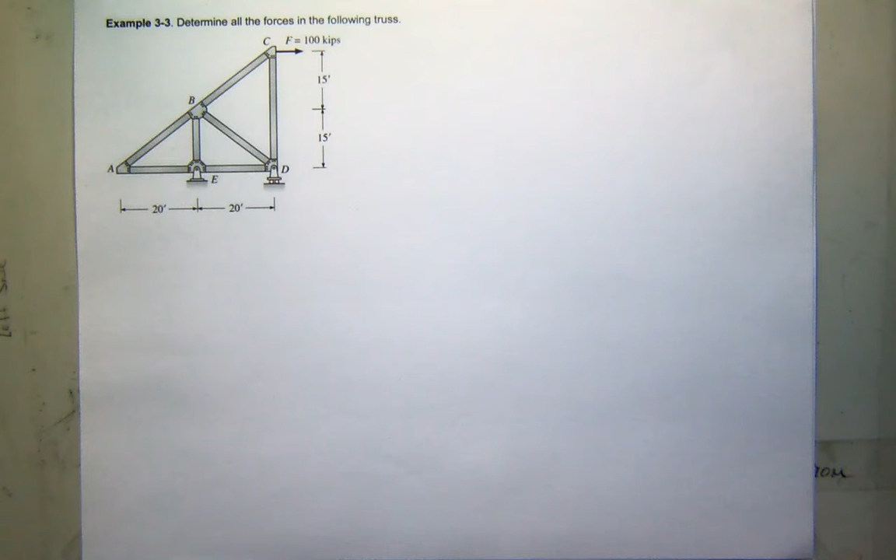Okay, so in this problem, we have a truss with a load of 100 kips applied at C, a pin connector at E, and a roller at D. So we've got 3 unknown reactions, and if you count them up, 7 bars, 7 unknowns.

Now it's a good thing to always start a problem looking for zero force members. Do you see any potential, what we call case 1 elements?

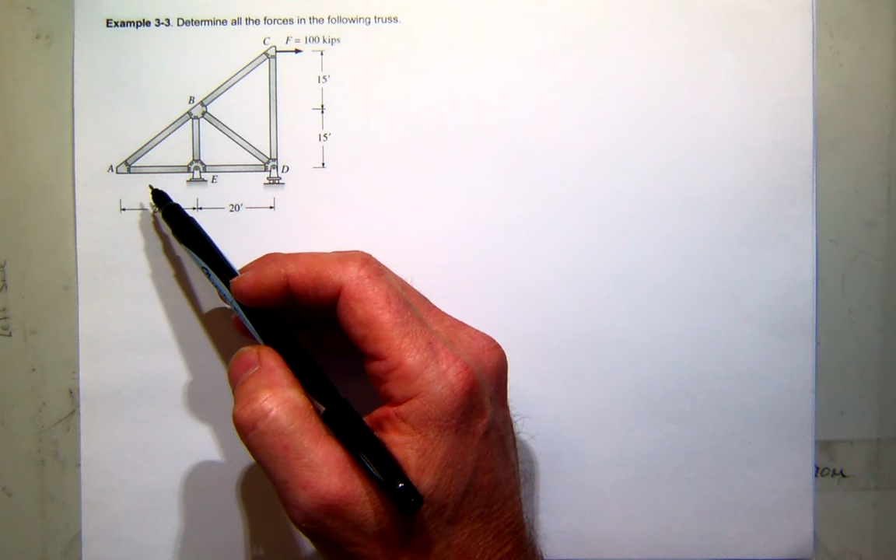A. What's good about A? Well, it's got 2 elements, right? But more importantly, no load. So that means right off the bat, I can write that I have a couple of zero force members.

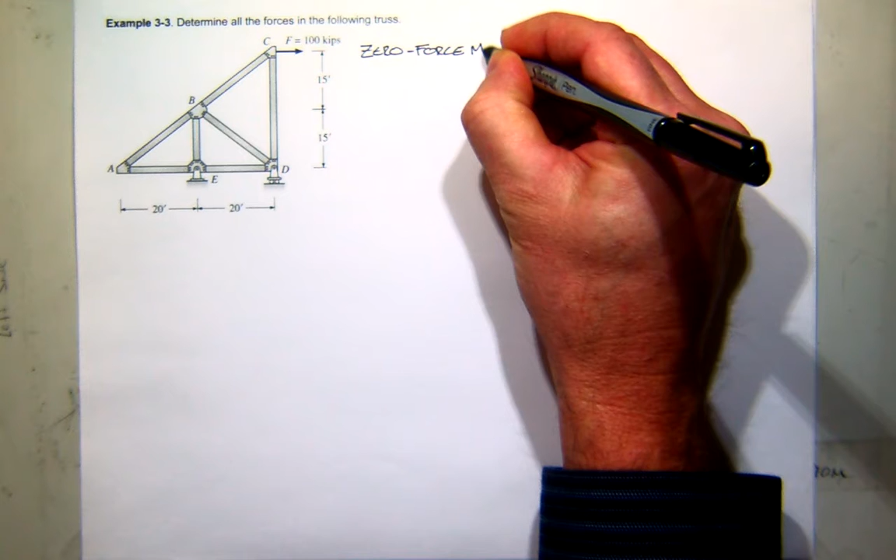And to connect that back to what we've done in class, I'll call that case 1, the 2 elements concurrent at a point with no load. So that means I know that the force in AB is equal to the force in AE and is equal to 0.

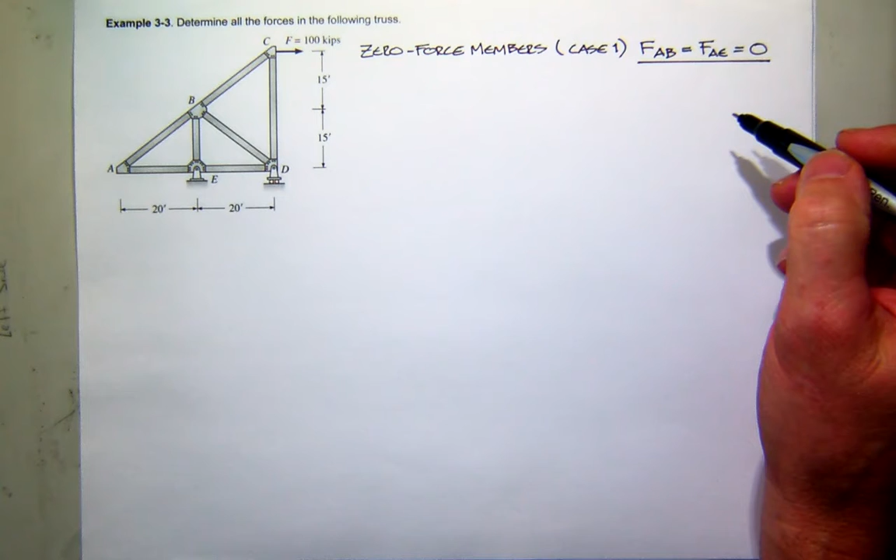Only one word of caution: if it's not a zero force member and you think it is, well, you really stepped off in the wrong direction. But if not, it can really be a help. So very quickly, I know 2 of my elements without much trouble.

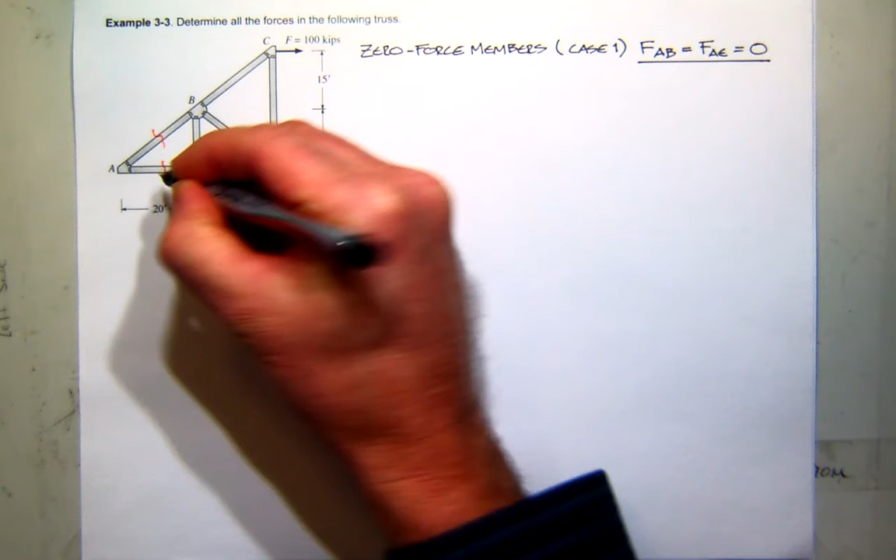With that said, I haven't found any of my reactions yet. Do I need to do that, or can I actually solve for some things before I get my reactions? Could I go to joint B now? No. I still got 1, 2, 3 unknowns.

Could I go to joint C? Yes, I could, without even finding my reactions. Could I go to joint E? Maybe, but right now no, because I've got 2 bar forces and 2 reactions.

Can I go to D? No, 4 things I don't know: 3 bars, 1 reaction. So it might be a good place, again, as a good first step, to get your reactions before you get started. I'm going to need them down the line.

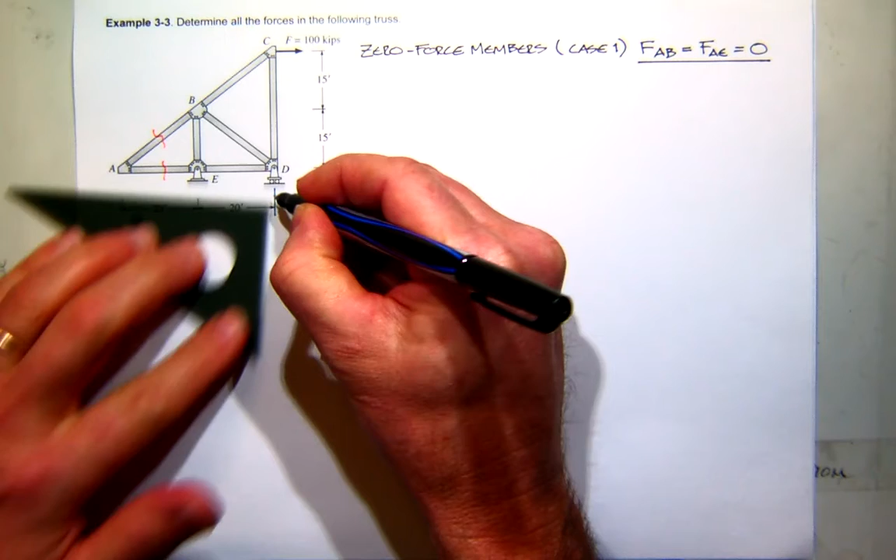So let's do that. I'm going to start off by assuming that I have a reaction at D, up, a reaction at E, also vertical, and I'm going to assume that I have a reaction in the X direction.

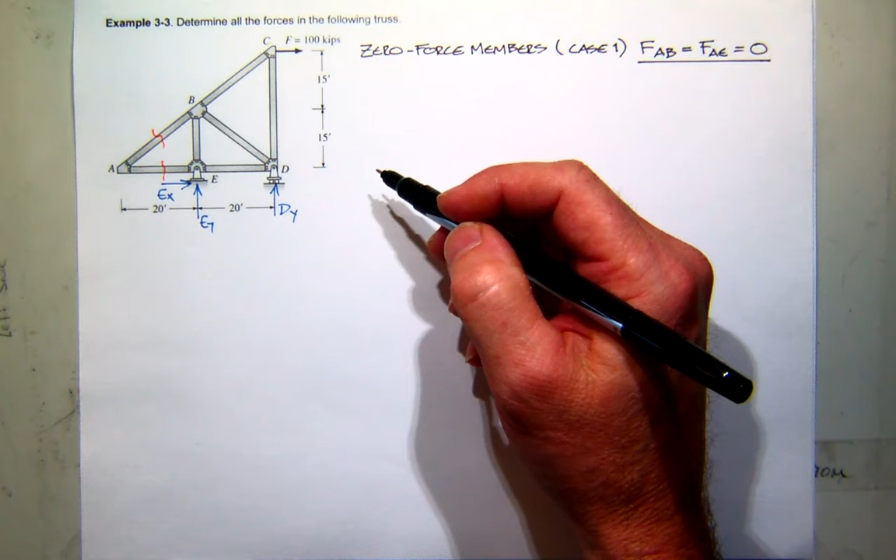Who did I leave off on? Mr. Montgomery, what should we do? Sum the moments at E. I like that. Why should we sum the moments at E?

Did you say D? Yeah, we can do it at D. You want to do it at D? Yeah, okay, I already wrote it. Sorry, oh, you've already written it down. I know how that goes when you make a mistake. And are you using pen or pencil? Pencil. Oh, you can erase. Yeah, we'll do D.

Now, why is D a good spot? Well, luckily, EX passes through D. It won't create any moments. So we'll be able to solve for EY.

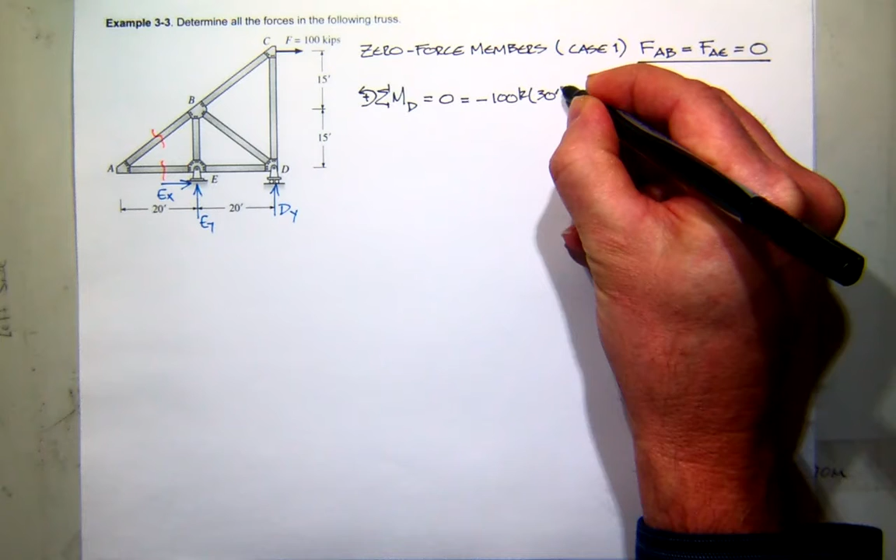So, Mr. Thusius, do that for me. You got a negative force up at C with a moment arm of 30 feet and the force of 100 kips, moment arm of 30 feet. Okay, and then you have a negative EY with a moment arm of 20 feet. Is that it? I think so. So what's EY?

Mr. Reddick, what do we do next? We sum forces in Y. Yep, we can sum the forces in the Y. Would summing the forces in the X direction be a bad start? Bad second equation? No, that'll work too. So sum the forces in the Y, Mr. Mokhtar.

Well, I got positive DY. What else? Is DY not negative? EY is negative. Oh, we're good. Oh, you guys are going back on me. You're right, EY is negative. Sorry about that. But on this free body, how did I draw it? EY is up and DY is up. Are there any other Y forces? Not that I see. So it looks like DY is equal to negative EY, which is equal to 150.

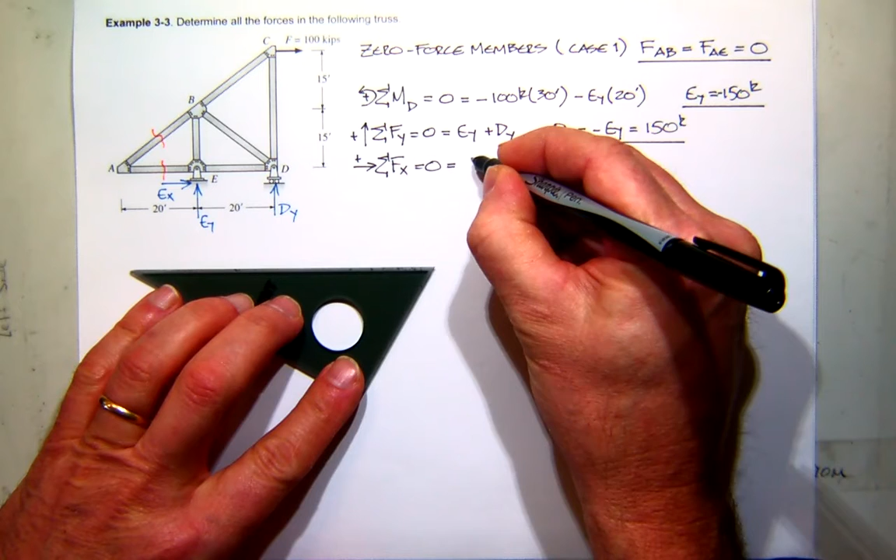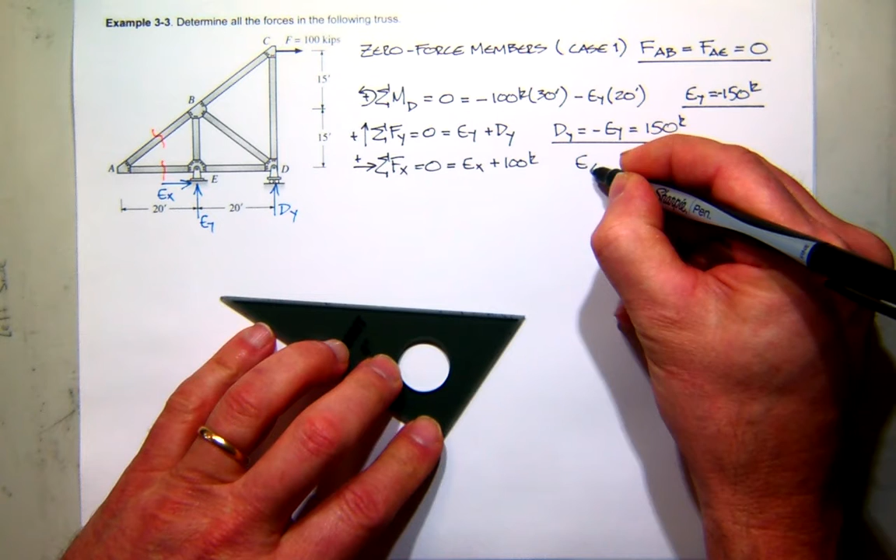What is the sum of the forces in the x direction? We just have EX, right? Nope. We have EX and, this is a tricky one, our 100. So EX is minus 100. Now remember, these minuses for the reactions just mean they're opposite of this. So we don't really have a sign convention on reactions. You choose whatever you like.

So far, so good? So now what do we do? Can we go to E? Yes. Can we go to B? No. Can we go to C? Yes. Can we go to D? No. So it's going to be E or C. Which one do you want to do?

Let's try that again. Everyone raise your right hand if you want to go to C. Overwhelming, not a majority. Yes. Mr. Montgomery, what did you write down? E. E. Okay, we'll do E there.

Always defer to the little table. So here's joint E. Now, what did I get EY to be? Negative 150, which means is it up or down? Down. So I'm going to come over here and say, look, there's the actual load there.

What about EX? Positive or negative? It's negative, so that means it's actually to the left. And it has a value of 100 kips.

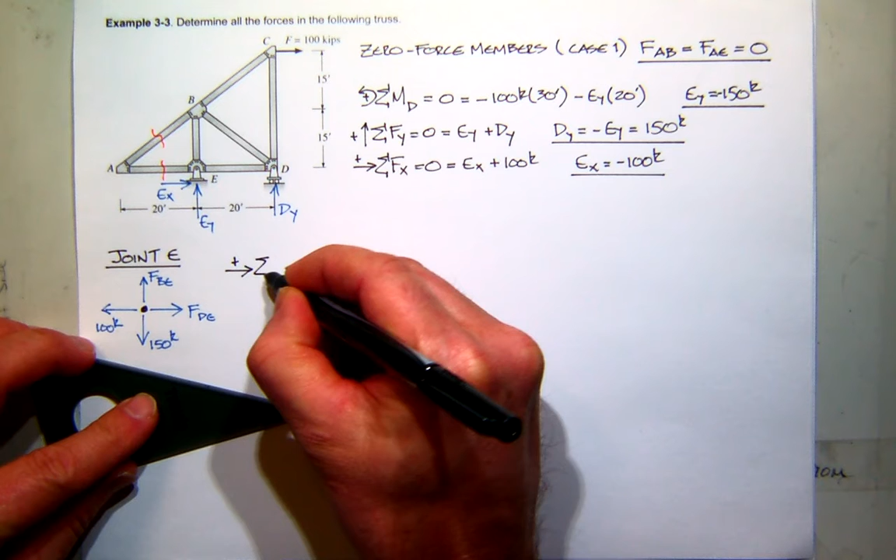What is the sum of the forces in the x direction? Minus 100 kips. Minus 100? Plus force. Wow. So what is the force DE equal to? 100.

Not so bad. Mr. Street, what's left? So let's sum the forces in the y direction. What do you get? Negative 150, positive FBE. Right. So 150 down, positive BE up. So what's the force BE? Positive.

So we now have these two guys, right? Yes, sir. So if your EX originally was 100 kips positive and you then draw your joint E, would you draw your reaction to the right then? Or EX? If you transfer these assumptions down to here, then what are you going to plug in for EX? Minus 100. If that was positive 100 kips, oh, I would have drawn it to the right. You would have, okay. What I usually do is once I make an assumption on a free body diagram, I don't change those. But later when I draw another free body diagram, if it helps me be more clear, I make the correction on that one. You don't have to do that. If that's confusing you, just stick with whatever you got. In both these cases, you would have plugged in negative values for EY and a negative value for EX. And you would have effectively gotten the same result.

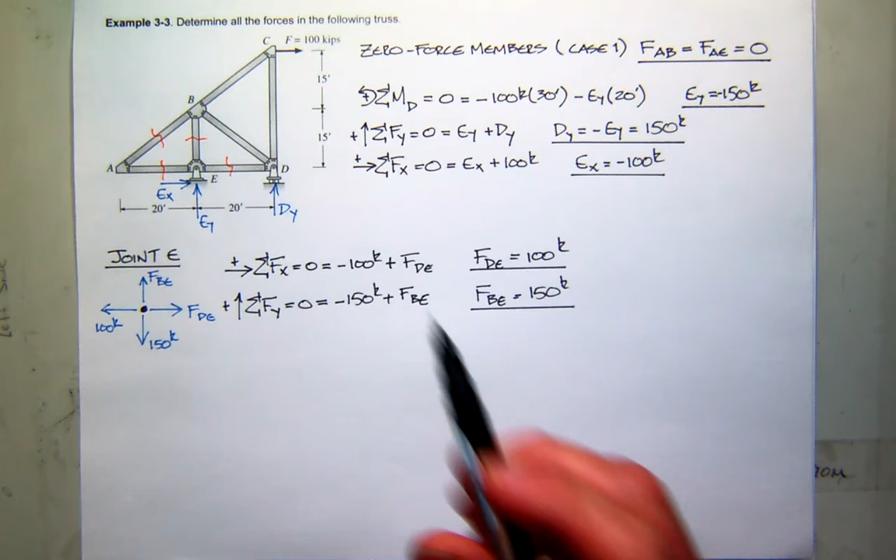Where should we go next? Can we go to B? Yes. Yes. Do we want to? No. The geometry there is just a mess. So we can go to C. Not really. Can we go to D? Yeah. Mr. Montgomery, which one did you write down? I did B because there are 3, 4, 5 triangles.

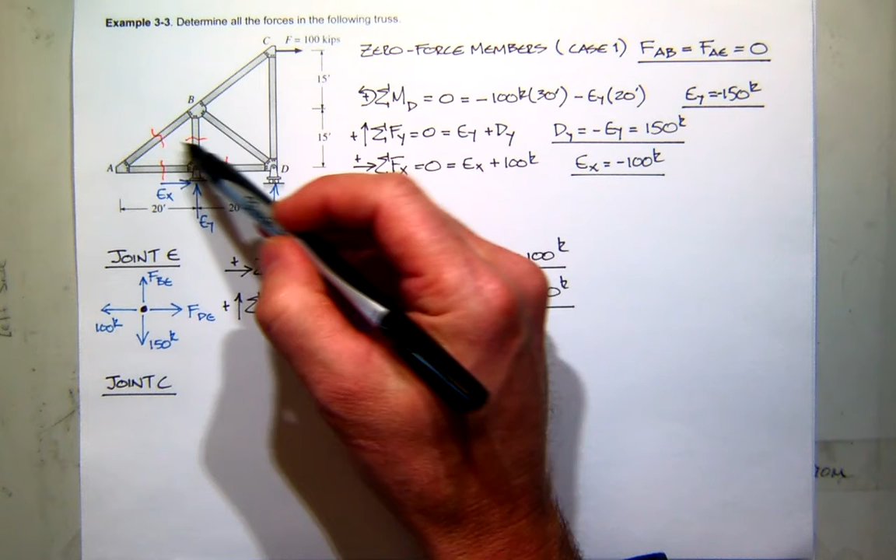Oh, erase that. We're going to go to C. Already done with that. Another reason I want to go to C is because I don't have to incorporate other answers. Now, I know I'm pretty sure this one's 0. I'm pretty sure about that one, but I just don't want to deal with that geometry. This is going to be so much easier to deal with. And it's not going to bring anybody else into play. Right? No previous answers. So I think it's cleaner. Plus, I just want to disagree with you once.

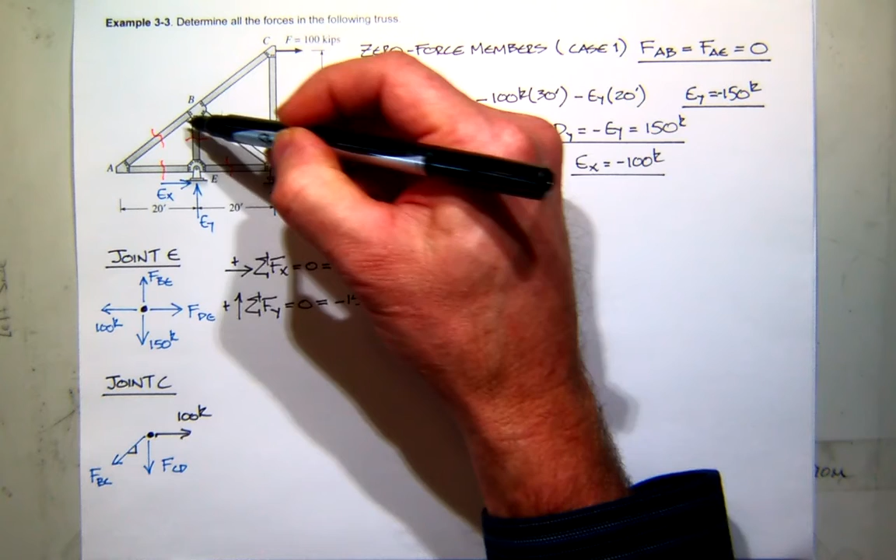Okay, so I've got the applied load of 100 kips, and I'm going to assume tension in CD and tension in, I think I called, BC. So we're going to now have to start dealing with this slope. So it looks like this element drops 15 and goes 20, which is a 3, 4, 5 triangle. You guys see that?

So I should be able to find my X and Y components really easily. So who did I stop with? Mr. Street, you're up, Mr. Brown. What do you want to do? Sum of the forces in the Y.

You sure about that? X. Why wouldn't we want to do sum of forces in Y? Well, both of our unknowns have Y components, but only one, BC, has an X component. So let's do that first. So let's sum in the X direction.

Make sure we're in equilibrium. So negative BC. Yeah, what component of that? 4/5. Right, so 4/5 of the force in BC to the left, and then what else? Plus 100. So it looks like BC is 125. You guys get that? Yes? It looks like it's positive.

I'm sorry, Arga, what's next? Sum of the forces in the Y direction. Yeah? So what's that? Negative FCD. Right? And then negative 3/5, right, so 3/5 of BC. Anything else? That's it. So we want to find FCD.

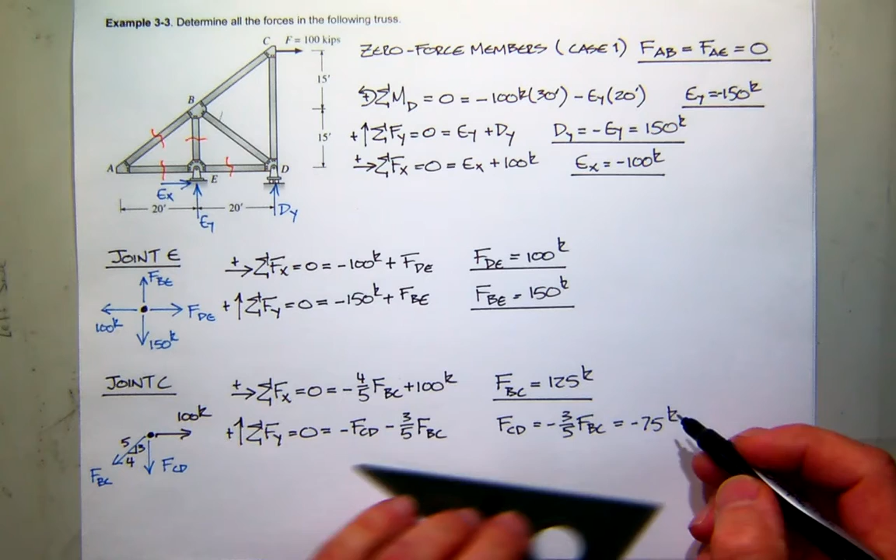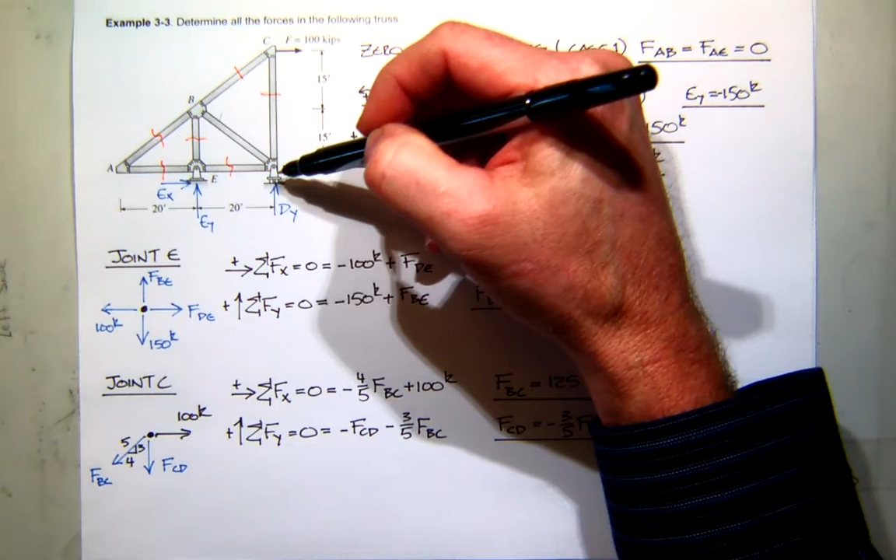So we got this one and this one. So who's left? Little lonely BD. Should we go to B? No. Well, we can, it's still going to be a mess. I think now D looks like the best place to go. You buy that? So I'll go to joint D.

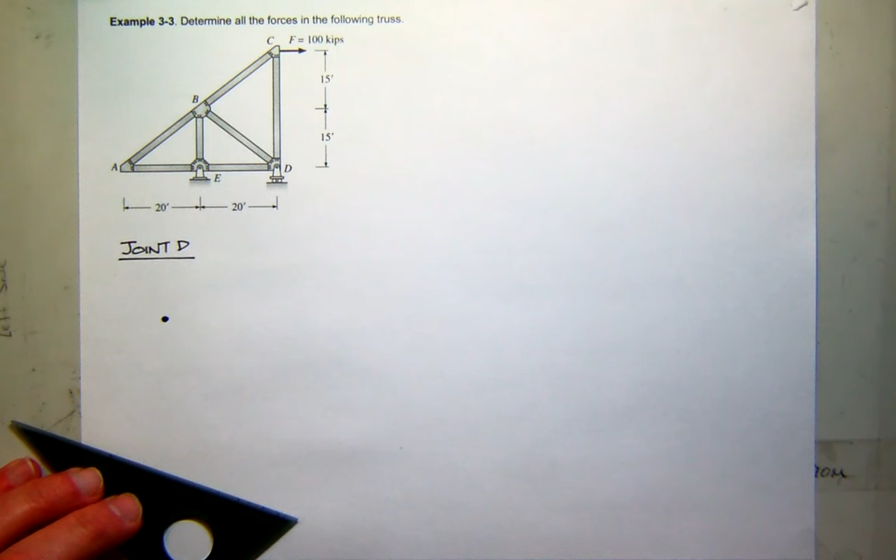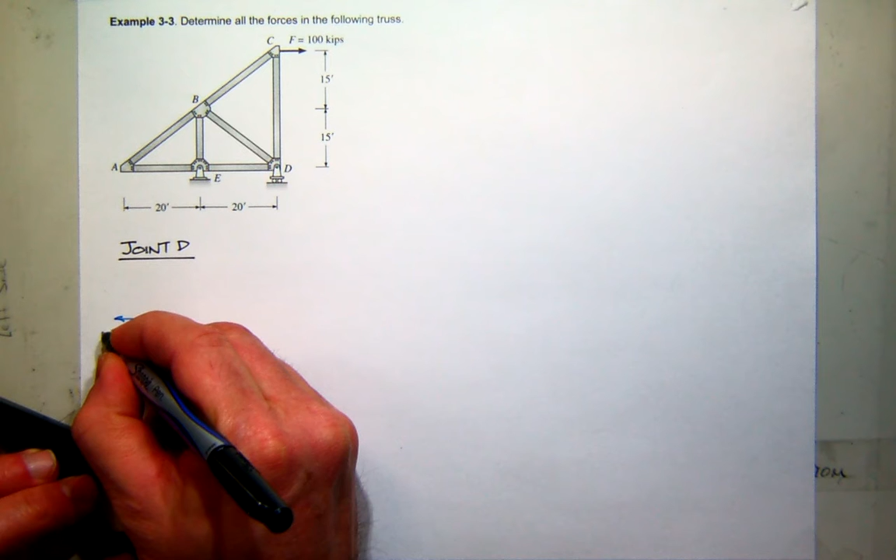So there's my force. What was the reaction at Dy? Oh, let me flip back. So D I assumed was up, and I got 150, so I'm going to draw that, 150. I've got the force in ED, I've got the force in CD, and I've got the one guy that I don't know, the force in BD.

And looks like the slope is similar to the one we did before. You got a change in the x direction of 20 and a rise of 15. So that's 3 vertical, 4 horizontal for my 3,4,5. And just to emphasize, this is the one I want to find.

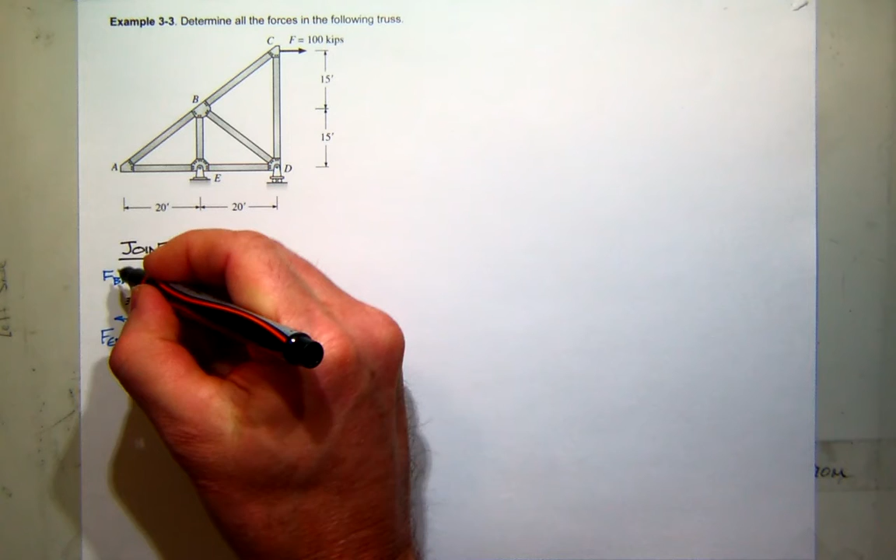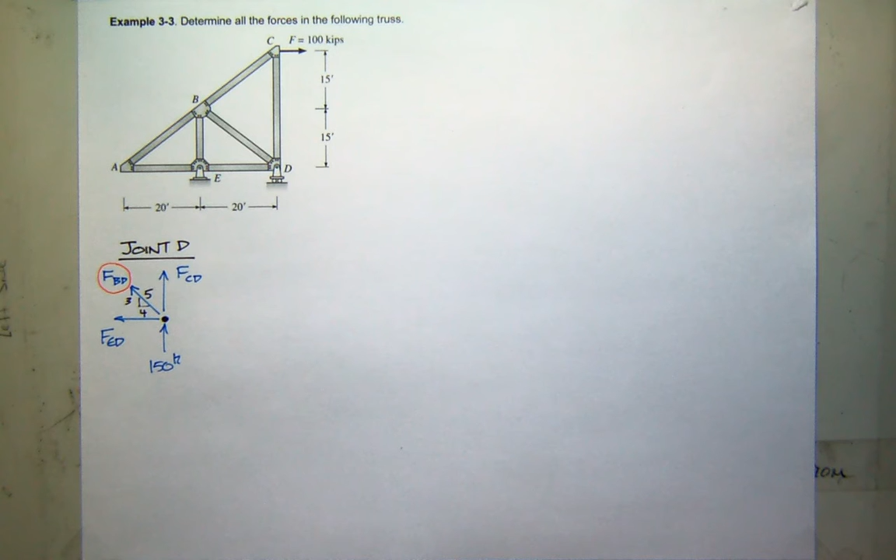If force CD is negative, how can you have it in tension? Remember, I always assume everything is tension. Now, when I use CD, what value am I going to plug in? Well, I'll look back at my previous equations, and I'll plug in negative 75.

So do I want to sum forces in the x or the y direction to find BD? X. Yeah, I think x is just slightly less work, right? Because I only have to include ED, CD is out, and the 150 is out. So it should be an easier equation. Can you do it in y? Yes.

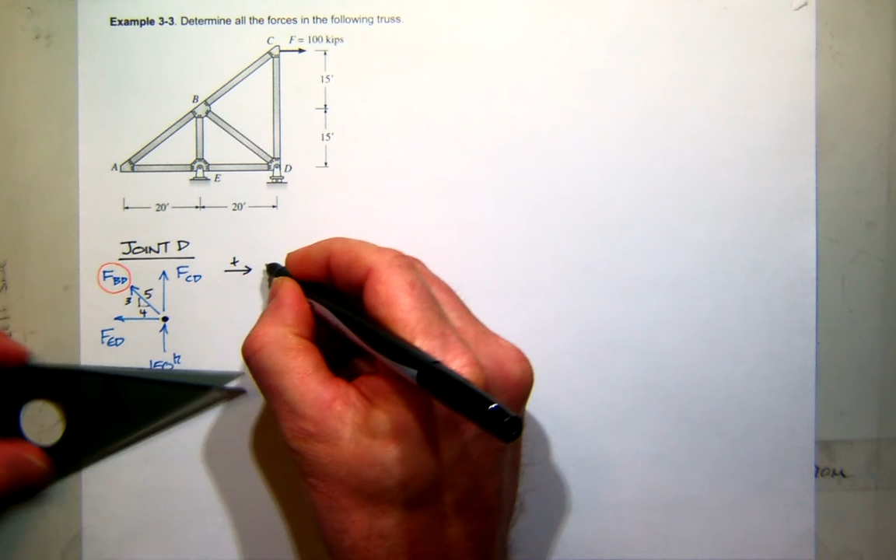So let's sum the forces in the x direction set equal to 0. Who's up? Mr. Robinson, you're up. Negative FED and minus FBD times 4/5. Sounds good to me.

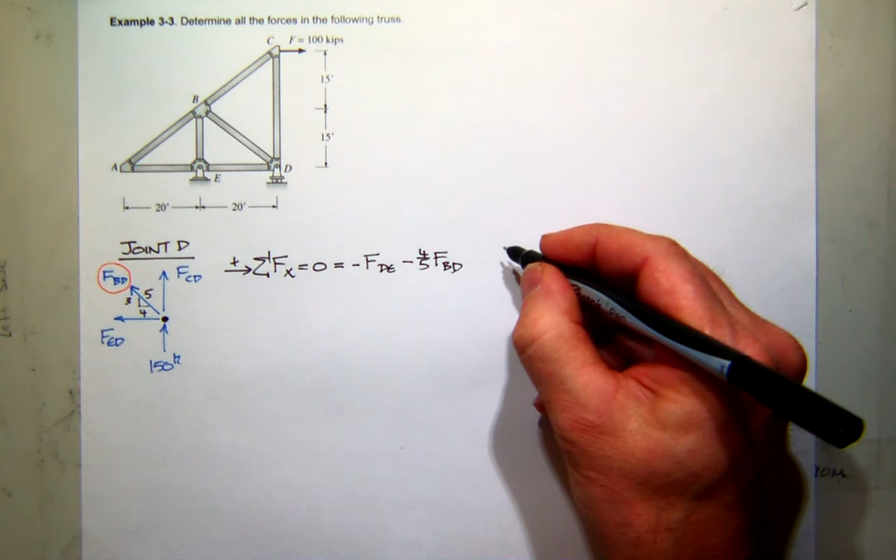So if I solve for the thing I'm looking for, FBD, it looks like it's going to be negative 5 over 4 of FDE, right? And what was FDE? 100 positive. So I put 100 positive in there, and I get negative 125. Is that right?

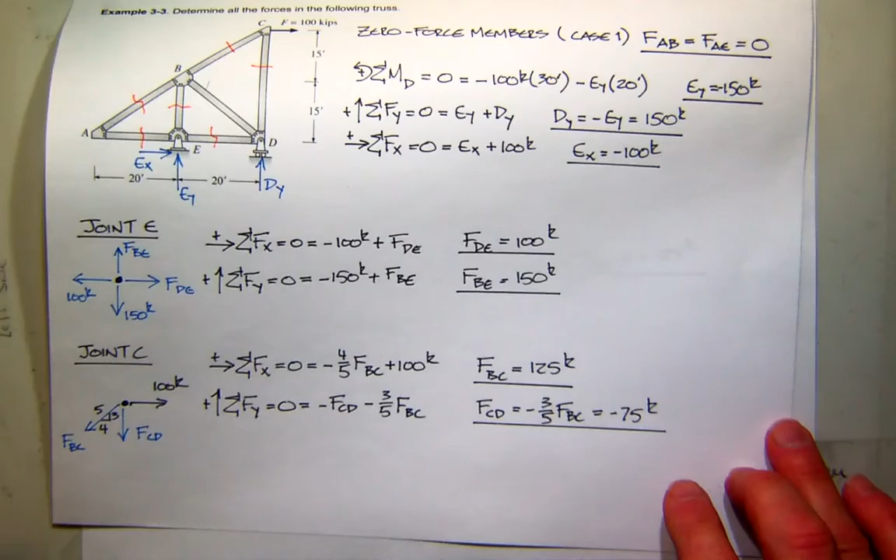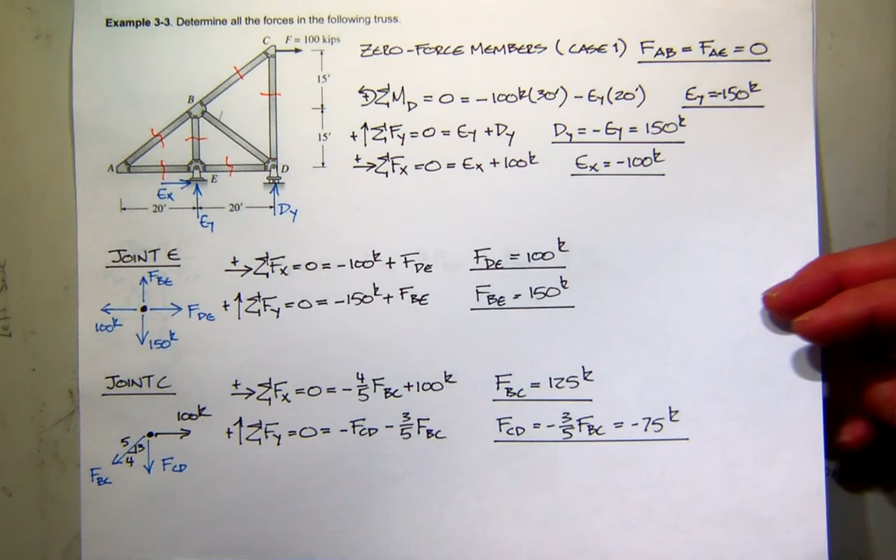So I think that's it. So we found 10 unknowns using our 10 equations. We got off to a good start because 2 were 0. A couple of our equations were pretty easy to solve. And if you look at the timer on this video, we've just hit 17 minutes, so almost half the time of the previous problem. Is this a workable problem for the homework, for the exam? No, still too much to do. But we're moving in that direction. Any questions? All right.